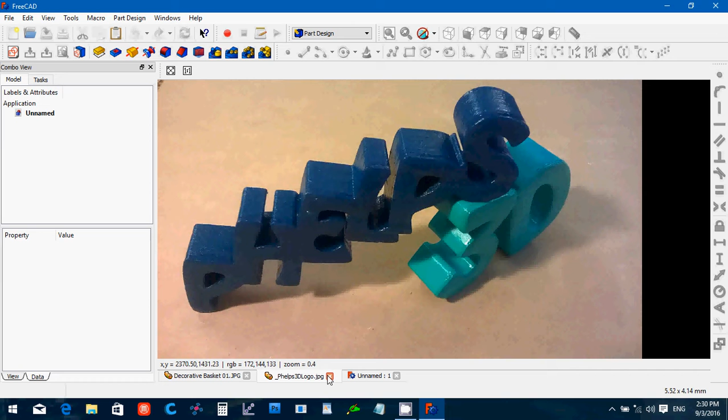What I ended up doing to remove the supports, instead of trying to just pull them or break them out, I ended up using a soldering iron, and I used a hose clamp to attach an X-Acto knife to the soldering iron, so I could heat up the knife and carefully cut the supports out from between the middle pieces.

So if you take this project on, I'm warning you, it's going to be a lot of work. Period. There is no getting around it if you're using an FDM printer. Or, of course, you have a dual-headed printer with dissolvable supports—this will work just fine. You can just print it and stick it in water to dissolve the supports. But I unfortunately did not have that at the time.

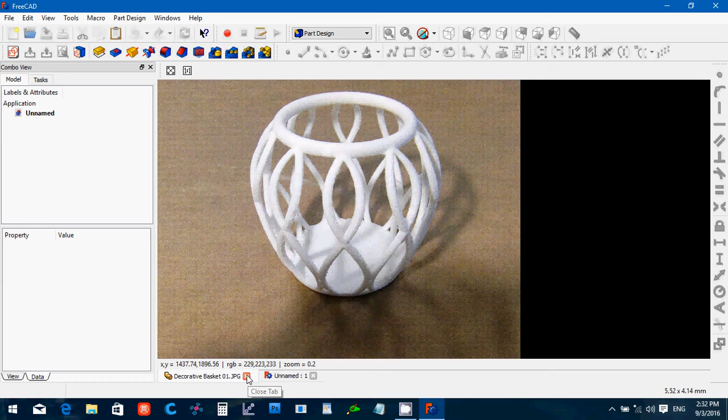Okay, so what we're going to do is start in Part Design, and I'm going to go ahead and create a new sketch on the XY plane.

I'm going to start off by drawing a circle, sketching a circle, and setting the center. Select it, go to radius, and we're going to use 2.2. Say OK.

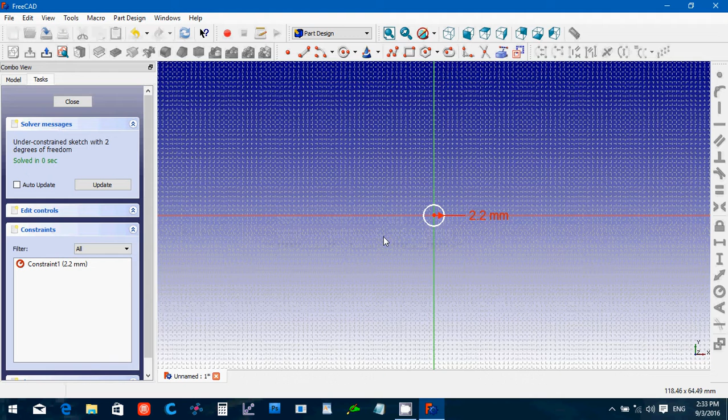Close that. We're going to copy it 4 times—or 3, copy and paste—so there are 4 of them. Now, the top one, the one that will be the top, actually has a different radius, so it's going to only be 2. Close that.

And then we're going to switch to 3, zoom out a little bit. There we go. Okay, and this top one, we're going to move it out to 90 millimeters high on Z. We're going to go 4 in the Y, and we're going to go 2.5 in the X.

Then we're going to switch up to the next one. This will be the next to the top one. We're going to move it to 60, 20, and in X, so -5. And then, oops, going the wrong way. This one here, it will be at 30, 4, and oops, not that—15 and 10.

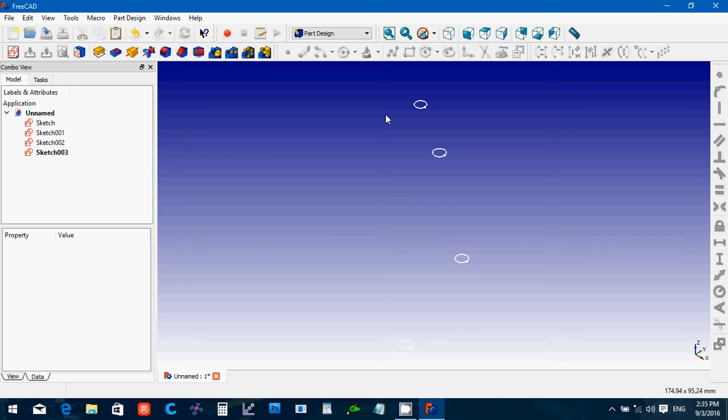So you can see this loopy type shape going on. We're going to switch over to Part, and we're going to create a loft out of those.

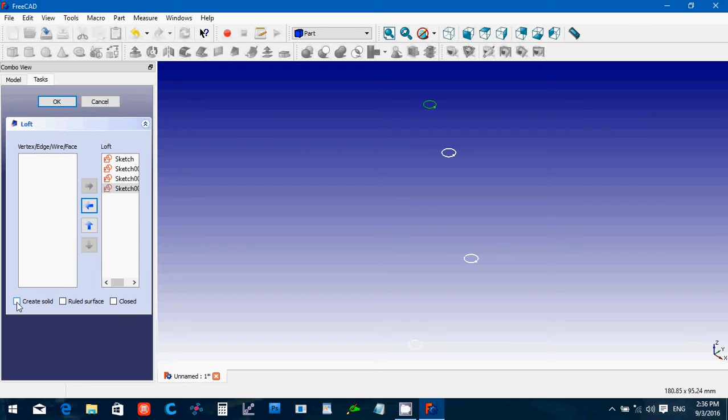Click on order, make sure you hit create solid. If you don't, it just creates a tube. Alright, and then I like to go in and hide the sketches because I'm pretty much done with them.

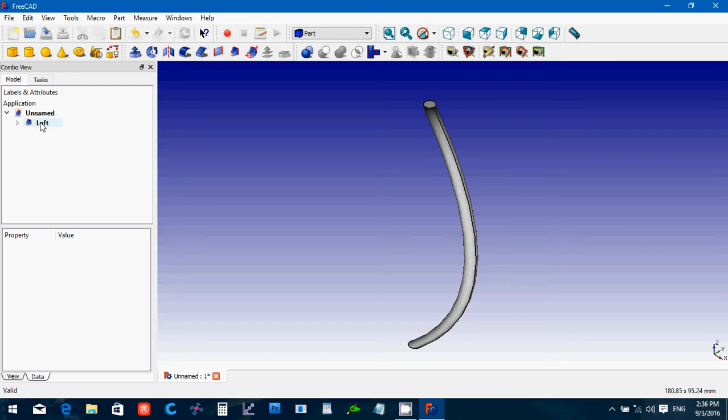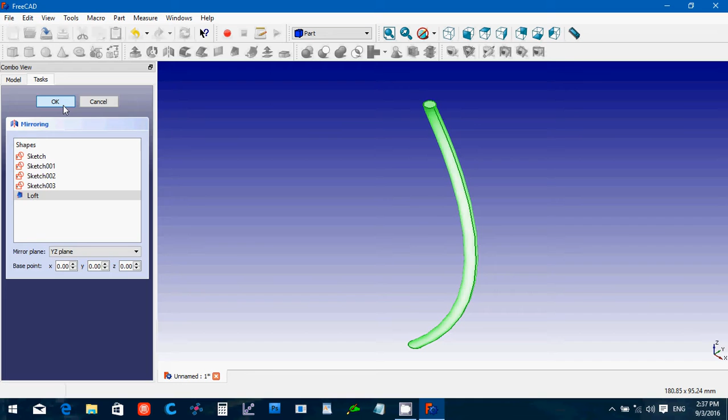Now, what we're going to do is we're going to mirror, on the YZ, say okay. Whoops, wrong one, sorry about that. Why is it... why is it... yeah, okay, good. So now we have this.

So the crisscross pattern—I'm going to take and merge those together.

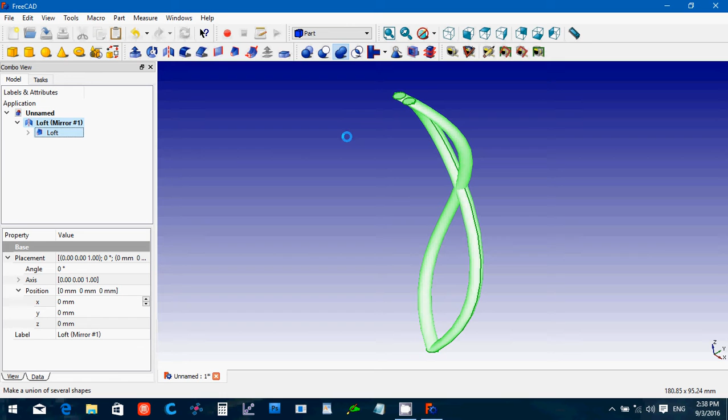This way I'm combining the original loft and the mirror together as one part. Good, okay, so that succeeded.

And for right now I'm going to make that just disappear. I'm going to hide it.

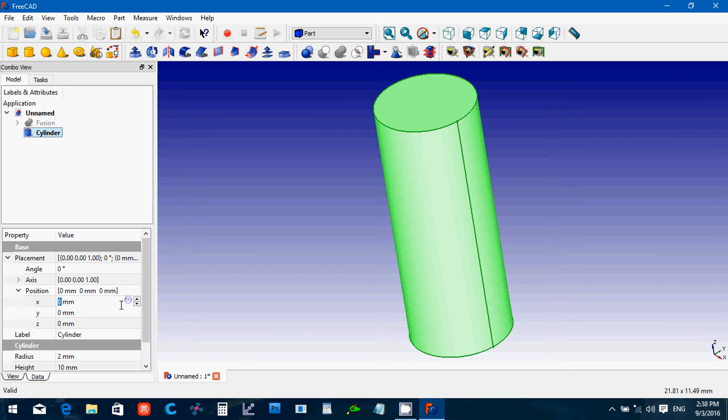So I'm going to go into and create a cylinder, and change the cylinder so it is 3 millimeters tall and a radius of 36.

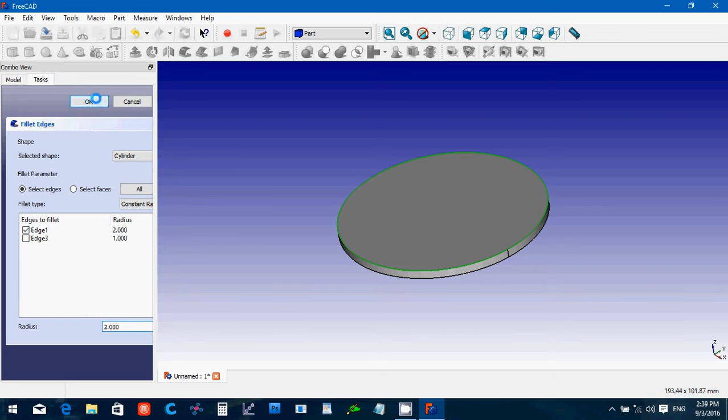And then what I'm going to do is I'm going to fillet that. Okay, this gives us a base of the basket.

Then we're going to create a torus. This top part of it, the first radius should be 34, and the other radius should be 3.

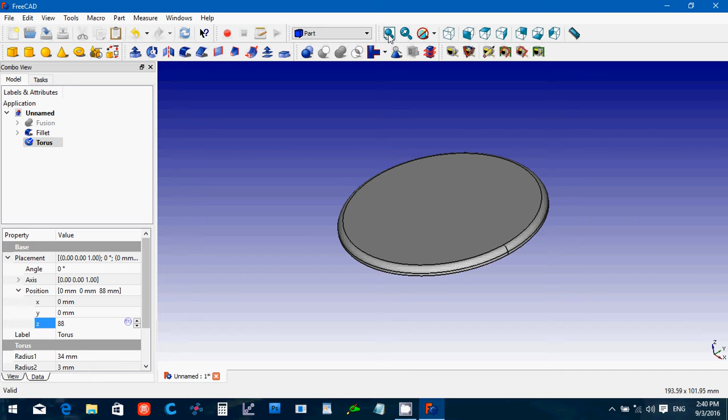And we're going to change the placement. That's going to go up 88. Clicking that. Okay, so that's the base. That's that.

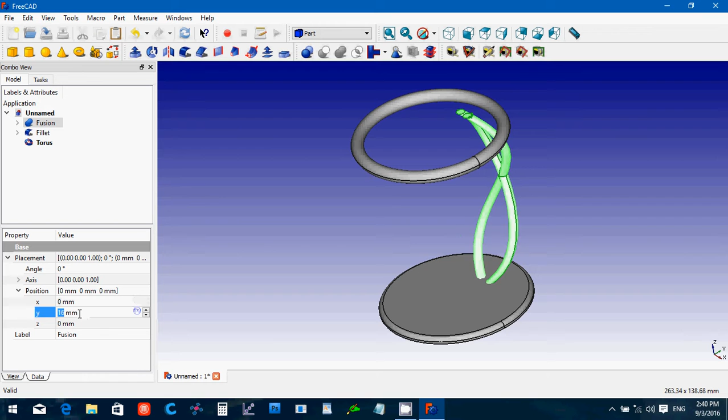Now what we're probably going to have to do is move this out first, and we're going to move it to Y actually. And let's take a look from the front. I want to make sure that it's at the top here.

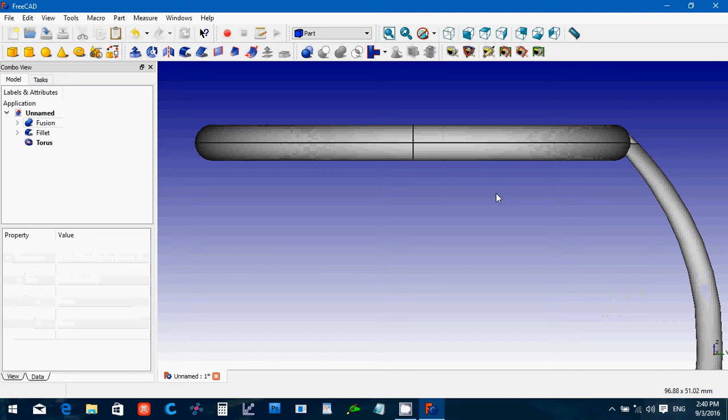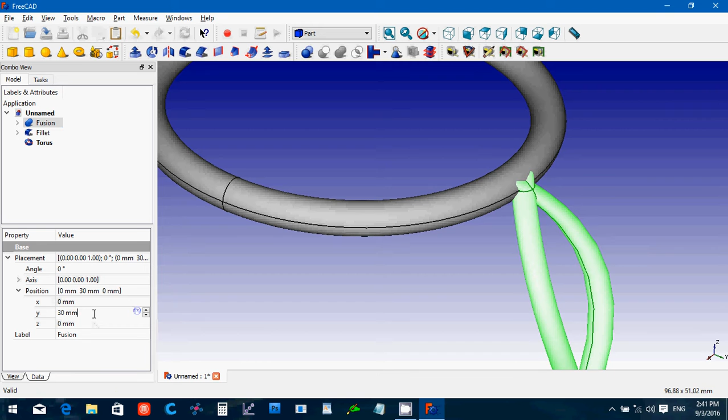Going inside of the torus. So depending on what you want, you see where it's crisscrossing here, you might want to go a bit more. Although now we've got it sticking out the other side. Okay, I'd rather have it sticking out.

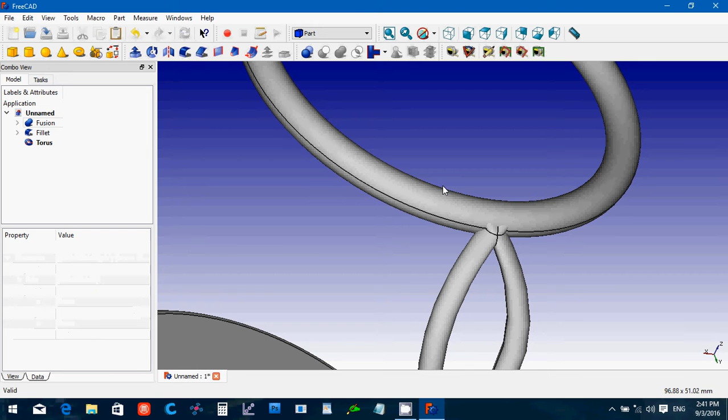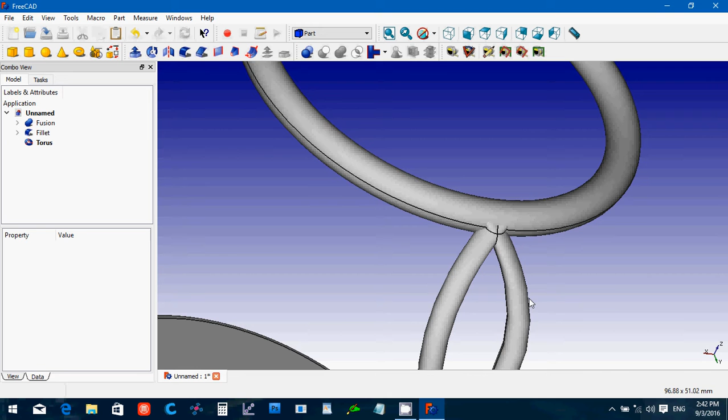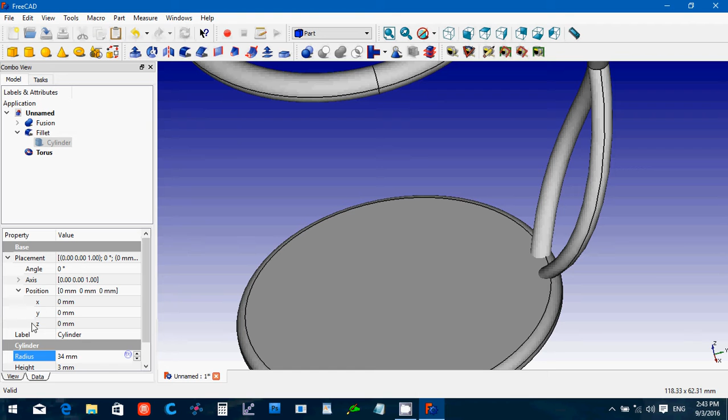But we might want to make our base a little smaller for some reason. This one's not the exact same arc as the other one. Take it away, so I'm doing - just trying to create it so it looks like it's coming right out of the part.

So what we're going to do is we're going to take this, we're going to copy the torus and the fillet. Control copy. Yes, control. What we're going to do is we're going to click the fusion, we're going to control click the second copy of the fillet, and we're going to cut.

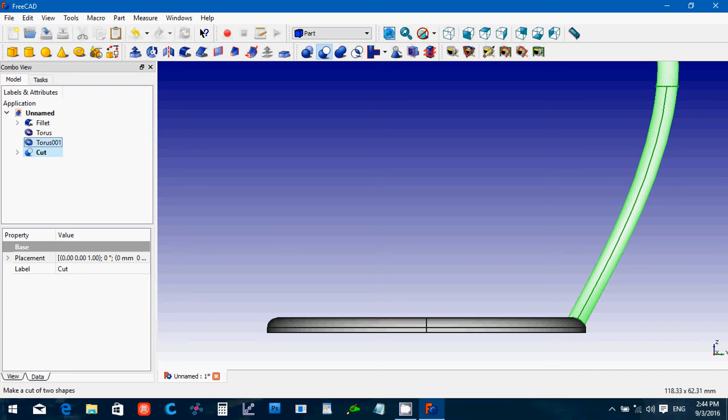Okay, now it's succeeded. Then we're going to take that cut and cut the torus copy. Should probably zoom back out. So what that did is now there should be no overlap between the parts.

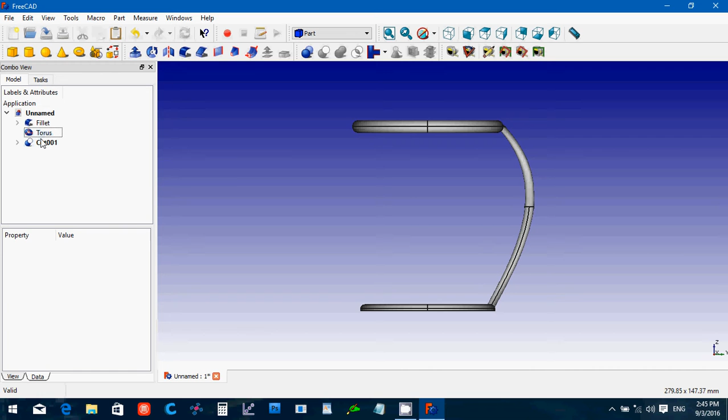And I should be able to take the cut, go to - let me go ahead and switch to 3D view. I like calling it 3D view, it's called axonometric view. Draft.

And we're going to create an array. Okay. Oh, oops, I think I just arrayed an array. You don't want to do that.

Hopefully, yeah, I already arrayed, so I'm going to delete the array and bring this one back up. Polar. And then now the question is how many? Let's try 8.

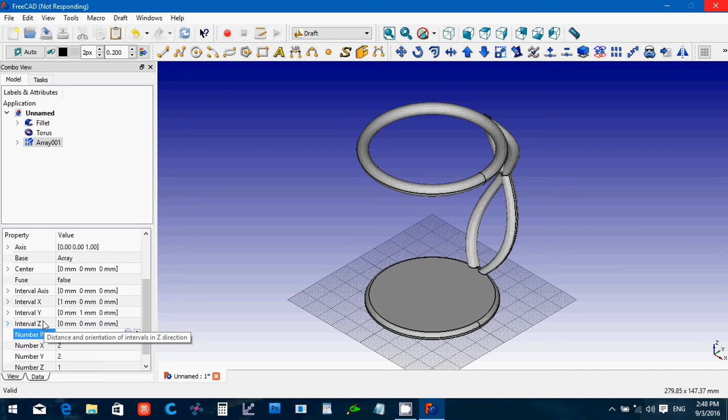So we can go 9. I'm trying to get them close enough so they're touching.

Let's take a look at the side. One's barely touching. That should be good. Okay, if you want, you can get rid of the grid.

We'll switch back over to part. Click the fillet, shift click the array, and then fusion those parts.

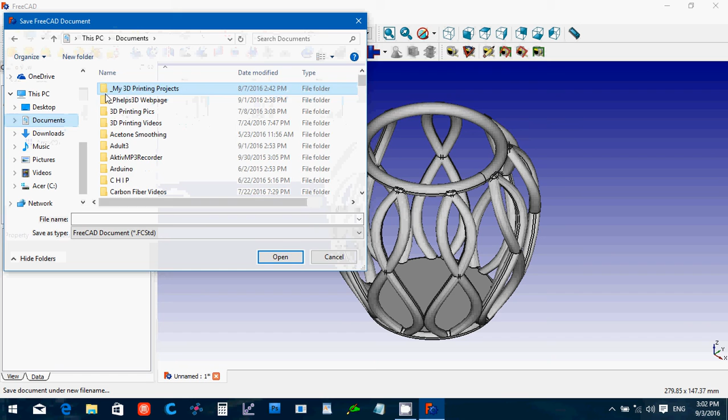Because nothing's overlapping, what we could do is just go ahead and export out. Well first, I'll save the file. Let's call this basket.

Because nothing's overlapping, we can get away with just doing an export on the 3 parts. So I made it so it wasn't overlapping by just doing those cuts - copying the 2 parts and cutting it from the fusion.

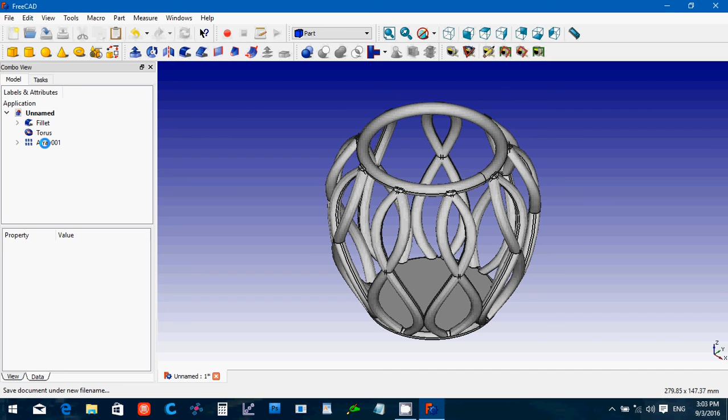So shift selected, export, call it basket again, STL.

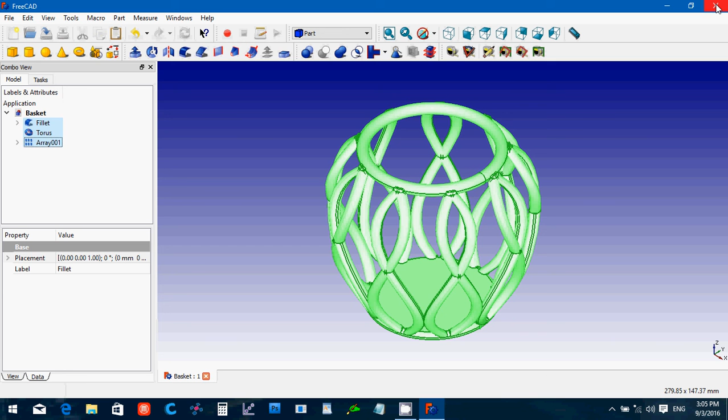There we go. Okay, and close that. Open that tab.

Oh wow, okay, no errors detected. Yay! That's good. So that should be ready to 3D print on your printer.